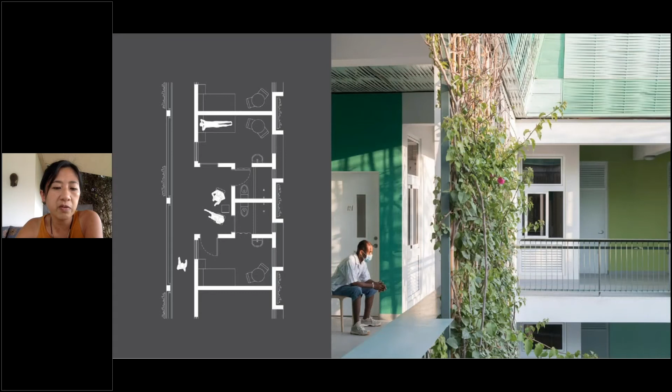In Haiti, we designed a hospital specifically for multi-drug resistant patients for our partner GHESKIO, and here around a central courtyard, we wrapped isolation rooms that were laid out to reduce the exposure of medical and cleaning staff to potentially contaminated air. We'd also built a cholera treatment center in Haiti, which is a waterborne disease which broke out there after the 2010 earthquake, as many of you I'm sure are aware of.

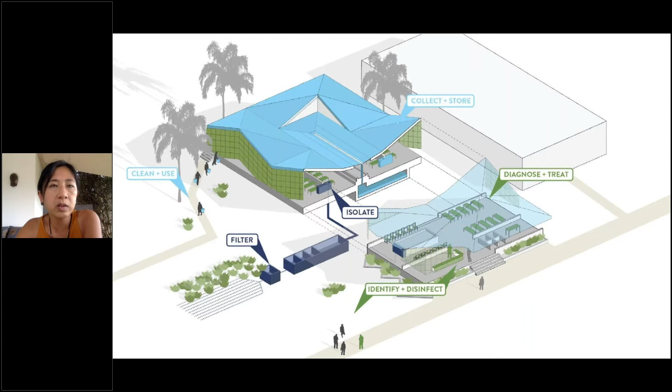And we built an underground wastewater treatment system to clean and filter the water and ultimately stop the cycle of reinfection that was coming up from treatment facilities. And the design of the space itself sought to bring light and air and greenery into an otherwise very miserable and undignifying disease. And then in Liberia, after the Ebola outbreak, we worked with the government to build a 250-bed hospital, which was designed not only around air and water, but around rebuilding the public's trust in the health system.

So beyond those design projects, we'd also been developing spatial research methods, which were trying to look at how we can connect space and outcomes. We'd worked with Ariadne Labs with funding from the Robert Wood Johnson Foundation on a year-long project aimed at looking at whether the layout of labor and delivery units was actually affecting the rate of unnecessary C-sections.

And, as you know, most evidence-based studies in healthcare look at the scale of the room or kind of elements that are very definable, but we were interested in the system forces that are affecting how clinicians make care decisions. So we were looking at the maternity unit as a whole.

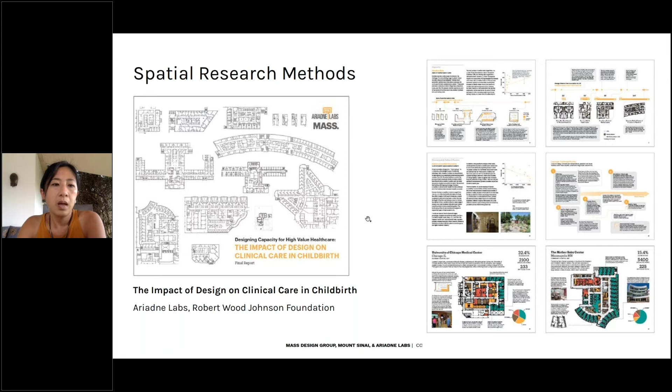We visited and collected data on case studies across the country, and we engaged clinicians to help us visualize the care processes that were going on. And that ultimately allowed us to generate testable hypotheses that linked healthcare space design measurements to C-section rates. And we were able to publish the results of our work in some peer-reviewed journals, which we were really excited about. So that was all the background, that was the foundation.

And so in early March, when COVID was emerging, we'd begun developing some general resources for spatial thinking related to COVID infection control. So when we got that call from Mount Sinai, we were able to start very quickly. And what we recognized was that there were many hospitals that were implementing spatial redesigns on the fly without much guidance to prepare for the COVID-19 surge. So what we wanted to do was capture quick interventions that were working and share lessons to assist other facilities on how they could be more informed in moving forward.

So what we did together was document how spaces were being adapted by developing quick and nimble approaches to research and collaboration. So the question that we had to grapple with was, what does evidence and research look like when we're moving so quickly and without much guidance? We couldn't apply the methods that we normally would, which would be clinician shadowing, holding workshops, running simulations ourselves to see how care processes work. In those early months of COVID, as Nicholas Kristof reported in the New York Times, it had been easier to be embedded in Army units in Iraq or Afghanistan than to embed with doctors fighting COVID at that point.

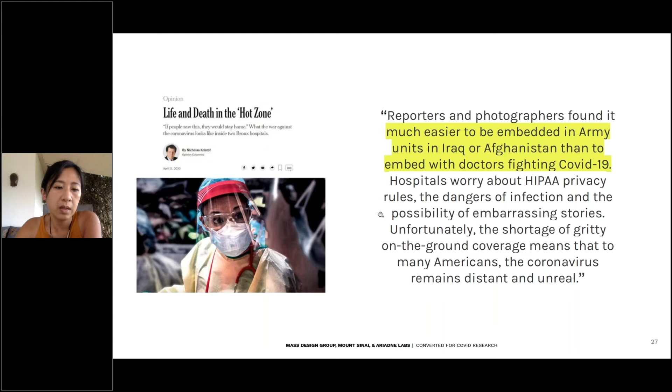So our research study lasted 3 weeks, and it was a rapid response spatial research method that employed a lot of different types of approaches. So over Zoom, the doctors led us on virtual walkthroughs of active COVID care units, and we had to really carefully outline what we wanted to see and have them do practice run-throughs on non-active floors ahead of time in order to optimize their time on the COVID floors and keep them safe and also not impede the care processes. And then using GoPros strapped to their chest, they also captured time-lapse footage of COVID ICUs, which allowed us to go in and later look closer into the photos of what was going on.

We ran a series of interviews with facilities teams and clinical operations teams, people who were putting these changes into place. And then we worked with clinicians to have them also annotate floor plans to visualize how the spaces were being used. Let me just go back to this for a second.

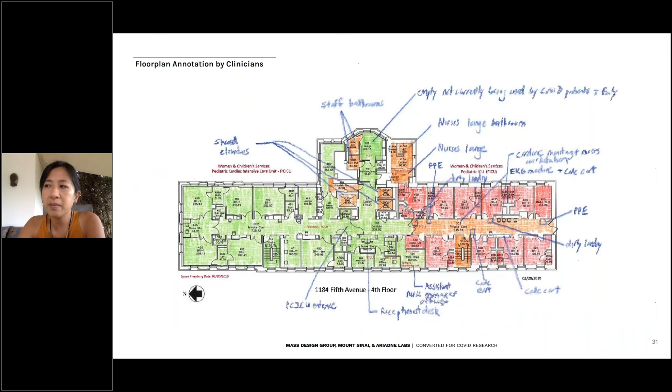So I think from a personal standpoint, it was a really incredible and surreal experience. As I mentioned, I'm located in Rwanda. So due to the time difference, physically, I was sitting on nighttime calls in my kitchen, slapping mosquitoes away, and virtually I was touring busy intensive care units in New York City. I think this type of collaboration across geographies, across time zones, across disciplines was really incredible and felt very urgent and of the moment. And what we saw on those phone calls was some really unprecedented spatial change. And we saw a lot of critical care taking place beyond the normal confines of the patient room.

So at that point in mid-March, Mount Sinai had already begun really radically transforming its care delivery system. They changed their main atrium, their main lobby here, into a 100-bed step-down unit. And then they built a temporary 68-bed tent facility across the street from them in Central Park. And then within their existing ICUs and med-surg units, they transformed 260 existing patient rooms, normal patient rooms, into negative pressure isolation rooms. So for this example, in this ICU, the openings had previously been open, and so they constructed walls and doors across those fronts of the bays.

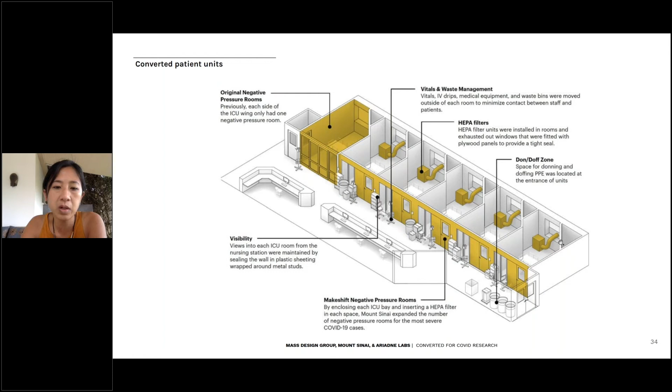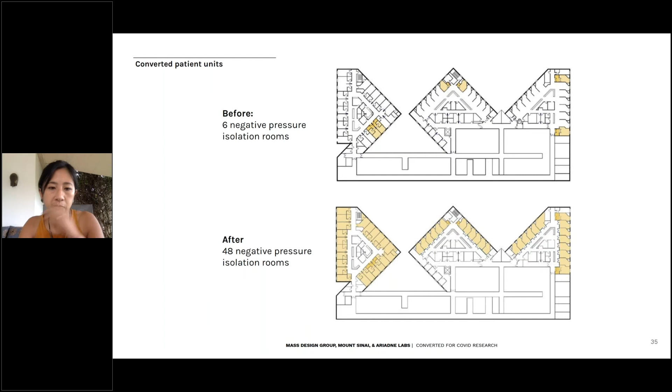They brought in large HEPA filtration units and set them up to directly exhaust outside of custom fit wood panels that were installed in the windows. And the pace at which these things took place was really radical. Here's a before and after of just one floor of the hospital showing how 3 intensive care units were converted. And the buildings themselves were literally intubated to expel contaminated air. I would pause for a moment to recognize the uniqueness of this floor plan, which was designed decades ago by I.M. Pei's firm. So it was an honor to be looking at such a historic piece of architecture.

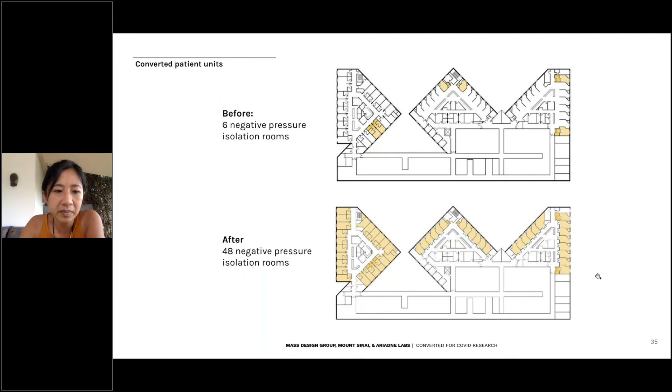So what we quickly grabbed onto was that the in-between spaces were really critical. You know, a lot of attention was being paid to the patient rooms themselves, how to make them negative pressure. But all of these hallways were really where we wanted to address risk. In order to minimize clinician exposure in patient rooms while still allowing for that really high acuity care to happen, these double-loaded corridors suddenly became the do-everything space.

And we recognized really quickly that enforcing proper infection control protocols in corridors and key thresholds like unit entrances was just as important as in the patient rooms. So in the end, we looked at 3 different COVID-19 units: an adult ICU, an adult medical unit, and then a pediatric unit. And we found that amidst the really heroic efforts to transform hospital-wide clinical processes and infrastructure, there were a lot of adaptations that varied between floors and between units.

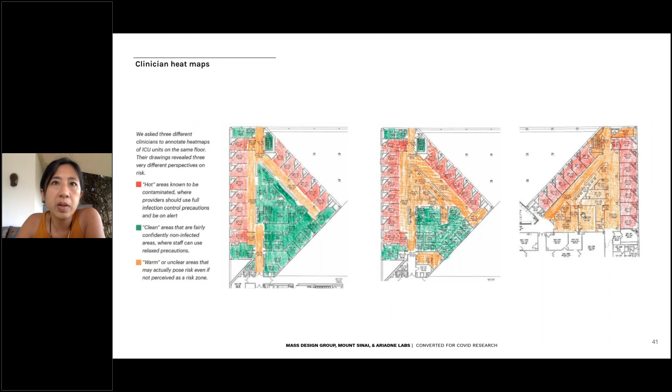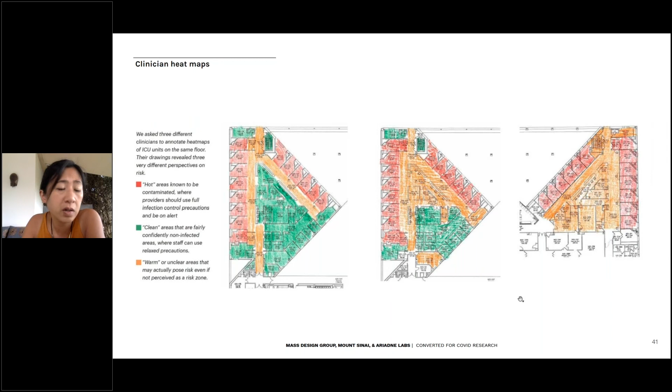So in the rush to expand bed and caregiving capacity, hospitals hadn't yet been able to have the time or the energy to develop the human-centered design cues to communicate key information, enforce adherence to protocols, and create order and confidence. And because staff responding to surge conditions are often redeployed and assigned to work in unfamiliar environments with new team members.

Imagine yourself coming to a new space for the first time with people who are fully gowned up. You can't tell who they are. You don't know them. Visual aids and design nudges, even things as simple as paint or tape on the floor, can help to lower infection transmission by making invisible risks more visible, orienting people, and creating spaces that instill confidence and collaboration.

So we mentioned that this is a research project, and ultimately the lessons that we took away from those 3 weeks were that first, time is of the essence, and as designers, we need to be able to mobilize really quickly and collaborate deeply and leverage nimble research methods to respond in situations that are unpredictable and constrained and out

of our control. And we also acknowledge that, perhaps more than ever, space has a really vital role to play. The physical environment shapes how people behave, how they interact, how they make decisions, and spatial literacy and design cues are key to indicating risk and standardizing behavior to keep people safe.

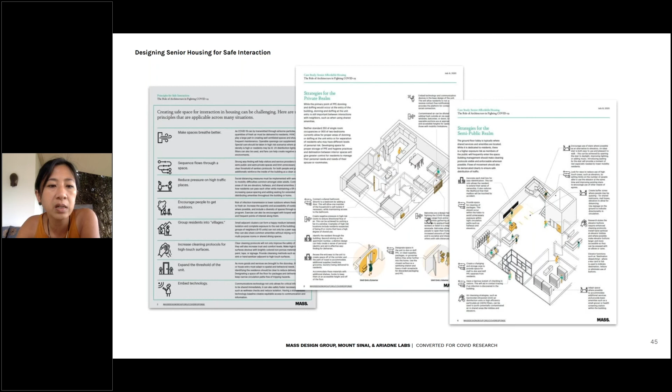now our team is working to put together a learning collaborative of multiple health systems. We want to look at a broad range of facility types and geographic contexts in different moments of the kind of wax and wane of the pandemic. We want to expand to look at a broader set of care delivery spaces, not just dedicated COVID care units.

We want to look at a broader definition of safety beyond infection control, but also things like communication and morale and stress management, and for all healthcare workers, not just clinicians. And ultimately, we hope to develop clear spatial guidance that can be used globally to transform hospital units in the

COVID-19 era. So I think just to conclude, MASS's motto or thesis since its beginning has always been that buildings are never neutral. They either help or they hurt. And as I think we all acknowledge, COVID brought to light a lot of cracks in our systems that were previously less visible. It revealed issues of equity, it revealed how interconnected and interdependent we all are, and it revealed that we need to be designing for health in the largest sense of the word.

So I'd say that, on the plus side, it's also created a bigger awareness of the role of the built environment in keeping people safe. There's a lot more discussions in general media and among the public, no matter what community or field of work you're in, and people have an awareness of what spaces you feel comfortable in and the density of those spaces and a tacit understanding of airflow versus stagnancy.